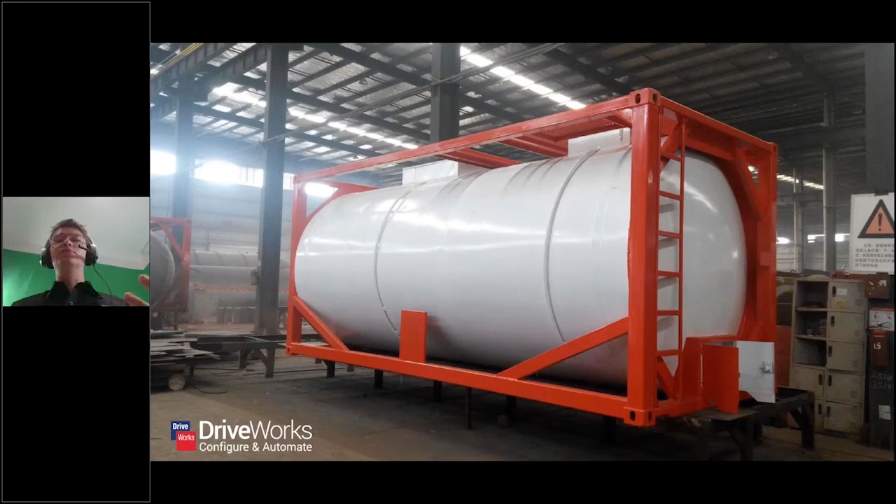Imagine you're a company that designs this pressure vessel and you allow your customers to create their own versions of it. Maybe they vary the dimensions, maybe they add or remove certain features, change the material, the color, whatever it might be, but the core product is still the same. That's what we mean by the same but different.

Now, I'm sure many of you probably aren't in the industry of making pressure vessels, but if you can try and apply what I'm going to talk about in this presentation to your own products, hopefully you can see the benefit of DriveWorks.

So what might typically happen in a normal sales cycle is we might have specification sheets like we can see here for this pressure vessel, where the customer or the salesperson can specify exactly their requirements for this product. So maybe they can change the dimensions or add or remove features.

These specification sheets are then passed to Joe, who is our SolidWorks engineer. And what he does is he sits inside SolidWorks and manually creates all of these files so that they can be sent to the manufacturing department. This is a very time-consuming process.

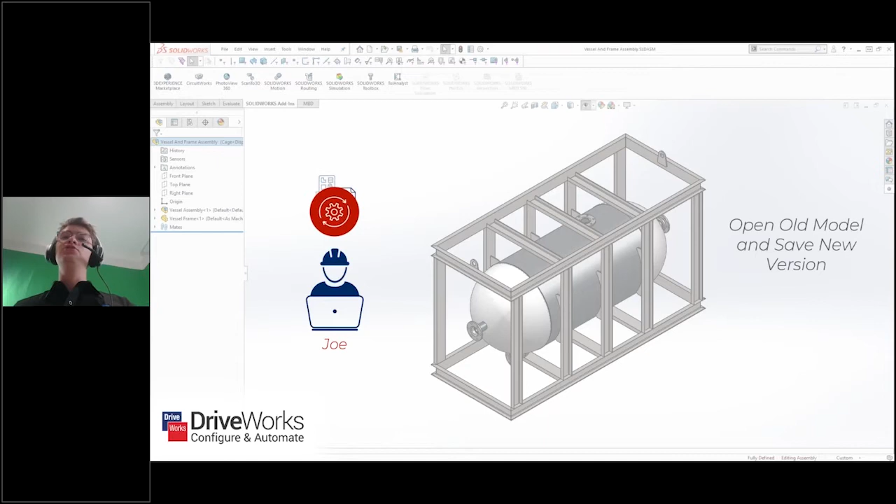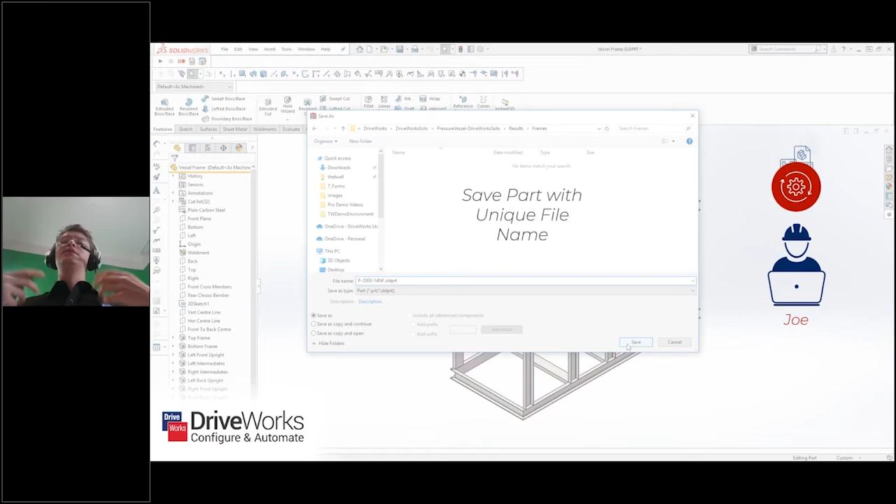So what you might have to do is open the old model and save a unique new version out specifically for this new order. Then you might have to open the part to be changed and make the relevant changes. The changes might be to do with the dimensions, suppressing or unsuppressing features, changing the material, changing some custom properties. And then once he's done all the changes needed according to the specification, he needs to save the part with a unique file name that can be identified to this unique specification.

And then he needs to do the same with the assembly. And once he's done all of that, maybe he then needs to make the manufacturing document so that they can actually build this product. So this is a rather time-consuming process.

But DriveWorks can actually automate this entire process for Joe and make his life a lot easier so that he can work on other things that his business wants him to work on.

And there are 4 key steps to automation using DriveWorks. The first step is to capture your design parameters. This includes selecting the dimensions and the different features that you want to be able to change according to these specifications.

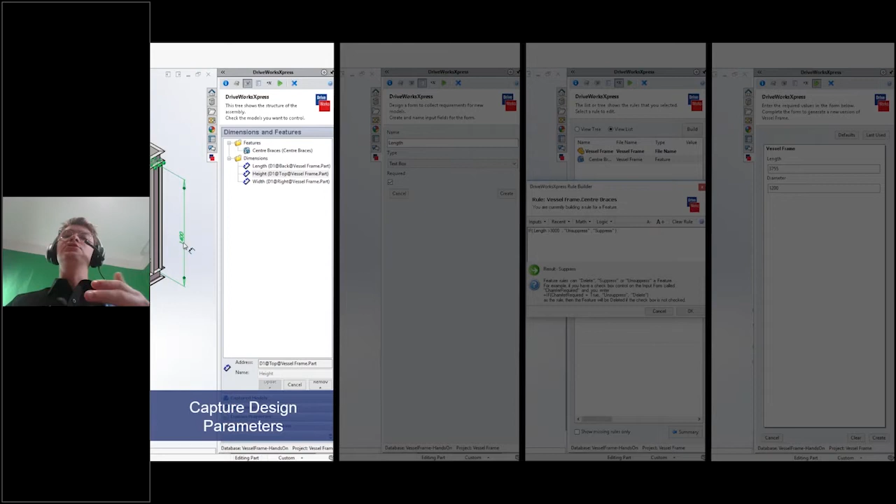Then we have to create an input form, and you can think of an input form as a user interface. The great thing about creating this user interface is it allows people to create specifications and all the models that go along with that specification without actually touching the 3D viewport inside SolidWorks. DriveWorks will handle all of the 3D side of things for you, and all you have to do is input data. So with our user interfaces, we can create text boxes, drop-down lists, check boxes, and dozens of other different control types.

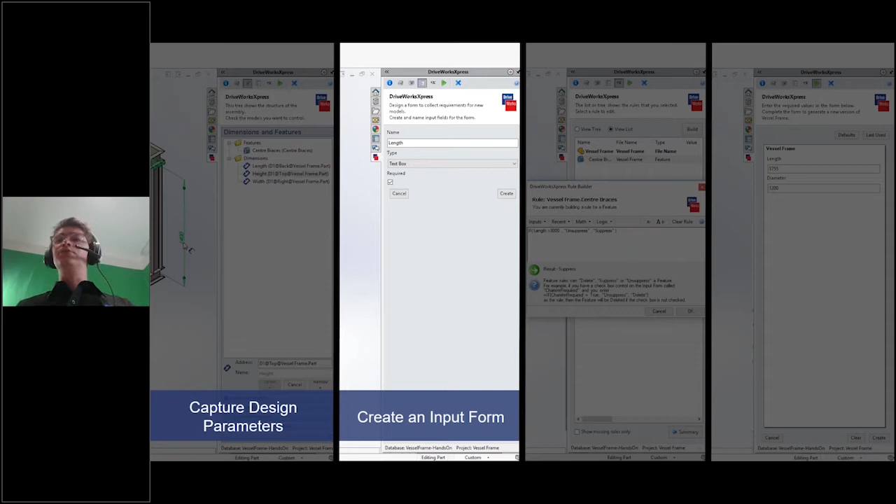Then we need to write our rules. And the really cool thing about DriveWorks rules is it's a great way of offloading knowledge from an engineer's head into DriveWorks, a system that can hold all that information. Regardless of whether those engineers leave the company, all of that design knowledge is maintained inside DriveWorks.

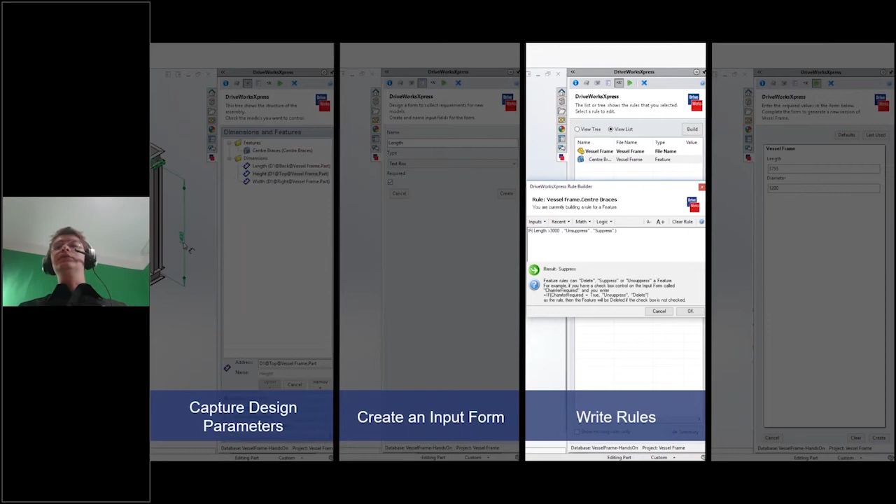And then the last thing to do is to run your project. This involves actually going into your user interface, putting data in, and generating unique models. So I'm just going to quickly run through that now for you.

Hopefully you can see my SolidWorks screen, just let me know if not. So when you're inside SolidWorks, the way you access DriveWorks is going to Tools, Express Products, and then DriveWorks Express. Now, if this is the first time you've done this, you'll be prompted to activate your DriveWorks Express product. All you need for this is a My SolidWorks account, and you should be able to activate this for free. But I'm just going to run you through a project that I've already got set up.

And here you can see the user interface where we can type things in. So for the customer name, I'm just going to put DriveWorks, but this could be anything. For the order number, in this case it's actually just a number of my choosing, but you can have this order number set up so that it automatically uses your company system for creating unique order numbers.

So I'm just going to go for a random number here, but as I said, this can be an intelligent number. Then we actually look at changing some of our design parameters, like the cylinder length of this pressure vessel design. When I hover over the text box, you can see we've got feedback from DriveWorks telling us we have to put in a value between 1,000 and 3,000. Now if I put a number outside of that range, like 800, we're going to get a warning from DriveWorks, and it's not going to allow us to create this design.

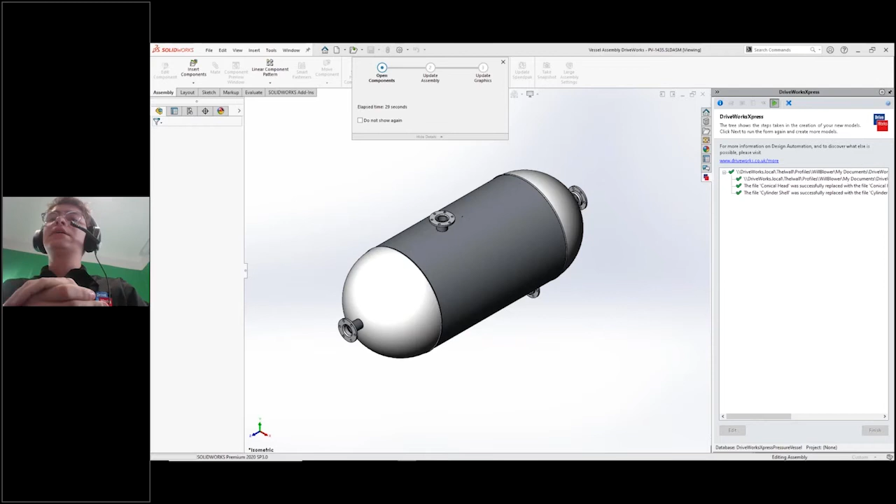As we're going to see in a second, DriveWorks is opening a master file, then opening the parts it needs to change, making those changes, for example to dimensions or different features. Then it's going to save out all these parts with unique file names. On the right-hand side, we'll get reporting and feedback from DriveWorks telling us what's going on. Because we're short on time, I'm not going to run through this bit, but it typically takes about a minute or so to complete that model generation.

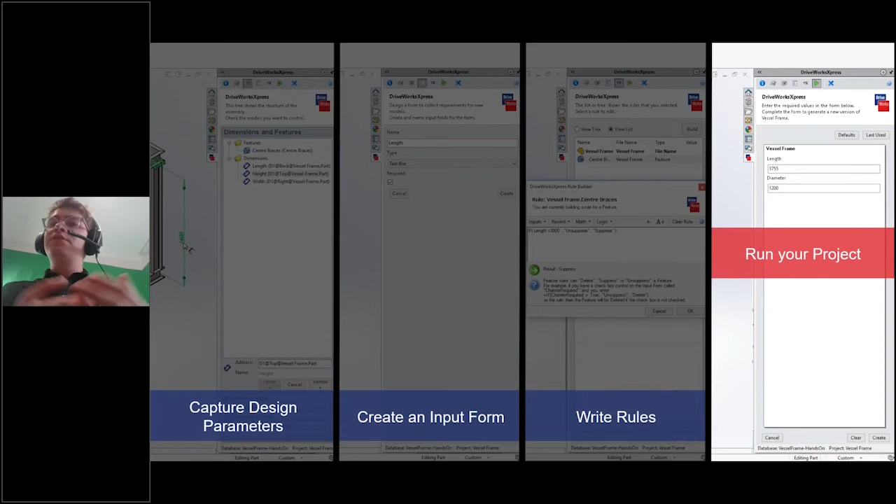And at the end of it, we have a completely unique model that's been created specifically for that specification we just made. So we've seen how DriveWorks does all this automation, but how can this benefit you and your company?

Well, so we've looked at it from a design and engineering point of view. There's less time spent doing repetitive tasks by our engineers. That means their skills can be applied to new and exciting projects. Maybe your company is developing a new product or developing some existing products that they can work on.

And also we're going to be minimizing mistakes. These mistakes come from a variety of places. One of them might be the result of doing repetitive tasks. No matter how many times you do a task, you could end up mistyping a number into one of your dimensions or suppressing the wrong feature, for example.

But from a business and management point of view, we've got a lot of benefits as well. We're going to be able to respond to our sales inquiries much quicker. And this is going to lead to a higher throughput, and it's going to allow us to get our products out the door much faster, and all the financial benefits that come along with that.

We're also, as I mentioned before, going to retain our engineering knowledge inside DriveWorks. So no matter whether our engineers leave the company, we're going to be able to retain all of that design knowledge forever. And new product development can be prioritized, and as a result, we're going to get these new products out the door faster because all of our engineers are now working on these new projects.

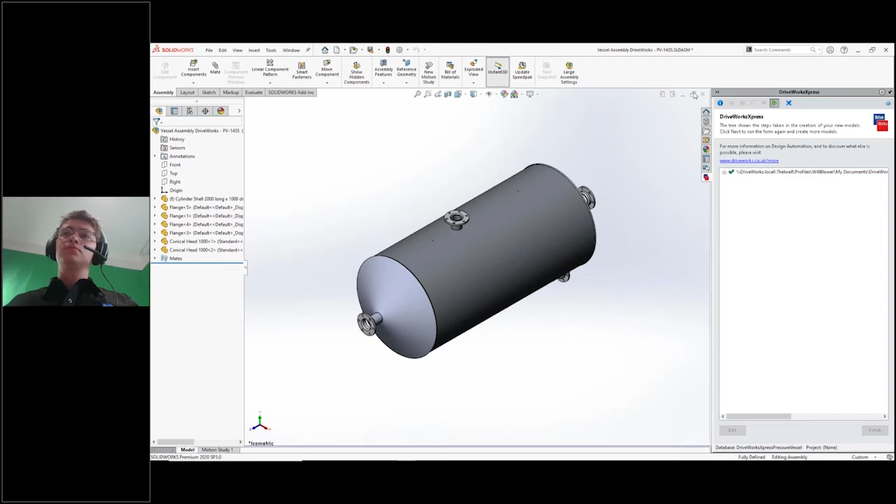Looks like DriveWorks is trying to generate all of our SolidWorks stuff in the background. Here you can see it generating all of our files. I'm not going to show you this, as I said before, mainly because of time constraints. So I'm just going to close SolidWorks down for now.

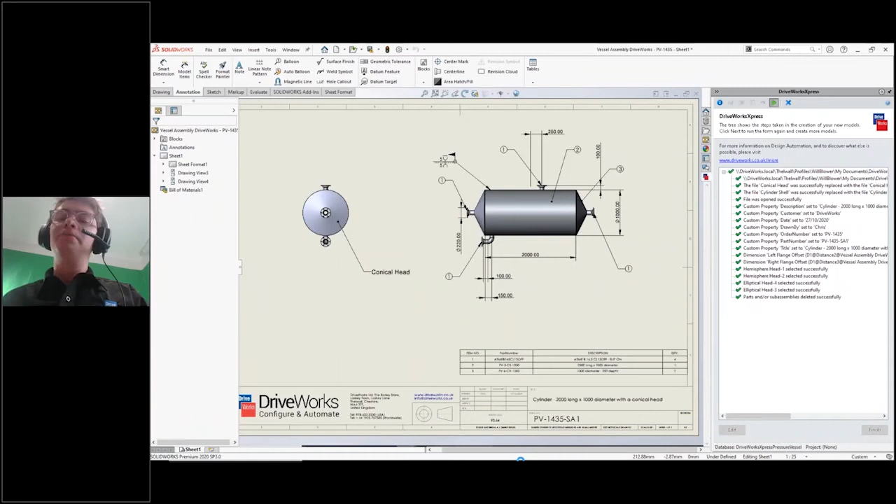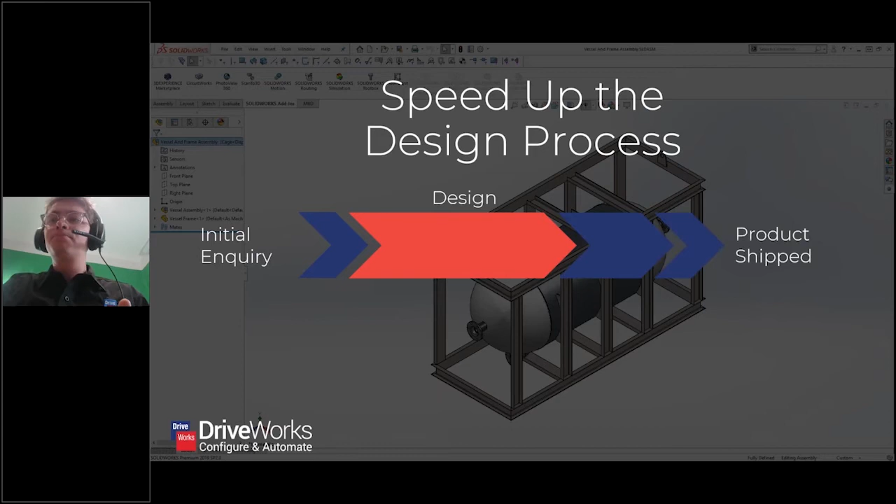Okay, so just to reiterate some of these points. We're going to speed up the design process. If we look at the typical design cycle, we've got this long period where people are making changes inside SolidWorks manually before we can ship the product out the door. But when we automate with DriveWorks, we significantly reduce that design time and get the product out the door much faster.

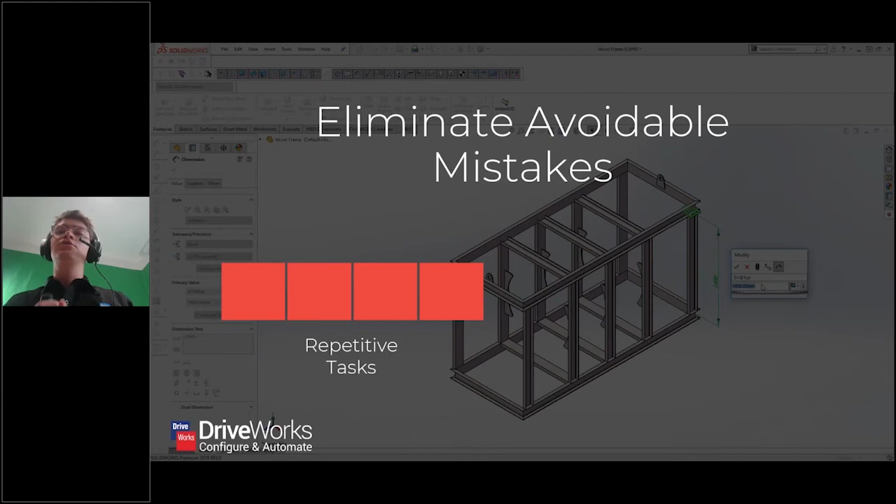We're going to eliminate avoidable mistakes. Repetitive tasks are the source of a lot of errors, so if you're changing the same dimension over and over again, at some point you're going to make a mistake. We're also going to minimize quoting mistakes. This is what I mentioned before about the user interface being intelligent that you build for DriveWorks.

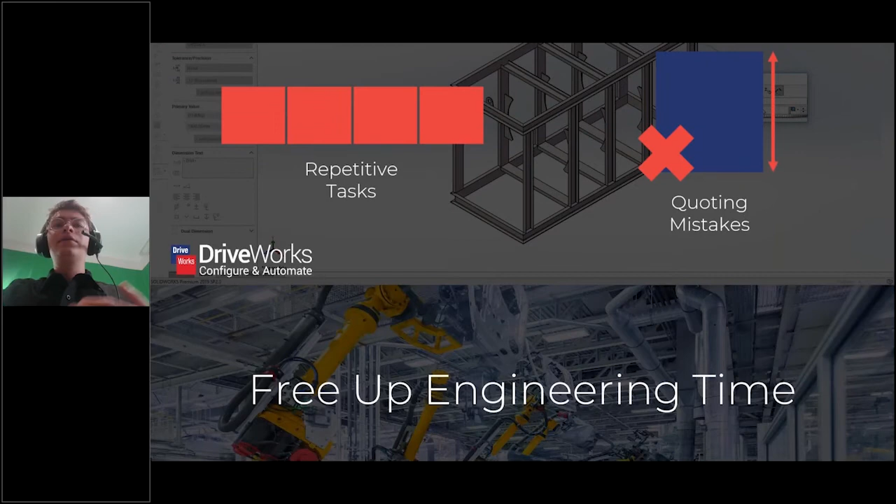It basically means people can only specify products which can actually be made. And then it frees up engineering time, allowing our engineers to work on new projects, develop existing products, and automate more. This is what we really like. As you begin to automate, all these time savings will allow you to keep automating and making your design process more and more efficient.

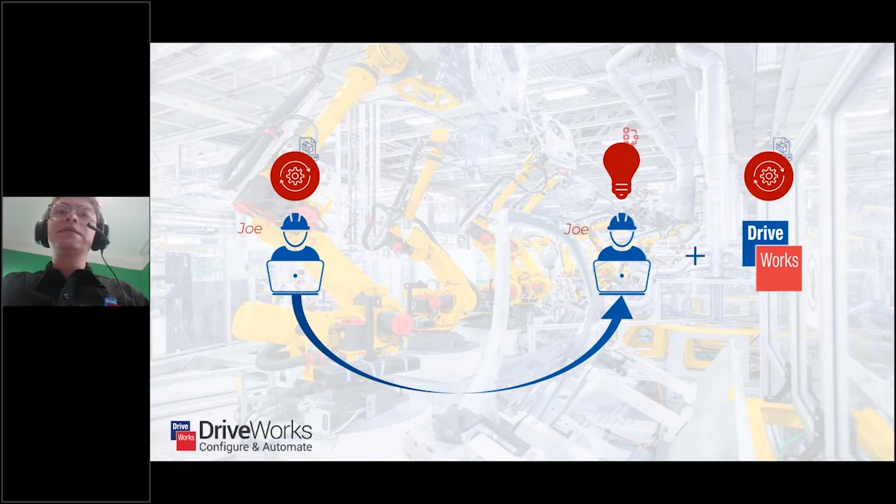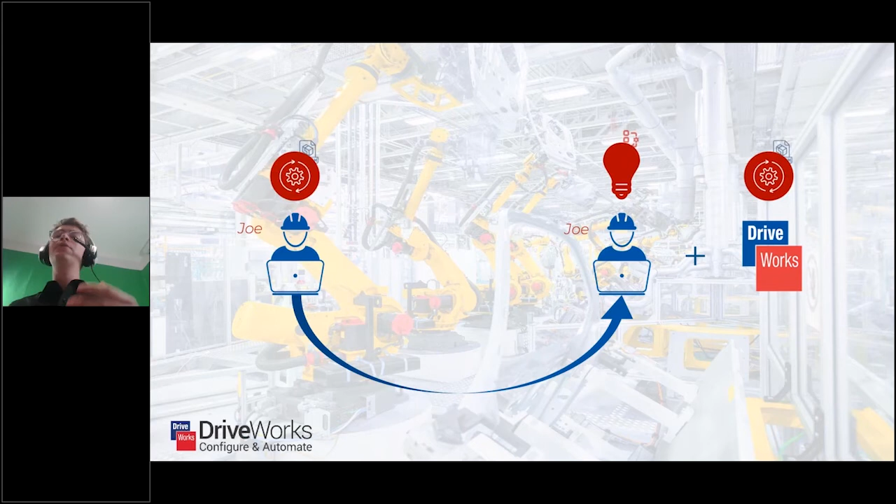So if we go back to Joe the engineer, on the left we can see how he used to work. He used to sit inside SolidWorks and generate all of these SolidWorks files manually. But now on the right we can see Joe working alongside DriveWorks, where DriveWorks is fulfilling the role he used to do, and now he's able to work on new and exciting projects and add lots of value to his company's design cycle.

So you might be thinking at this point that you already use some tools that can create unique parts for you, and one thing that might spring to mind is design tables. For anyone not familiar, a design table is essentially an instance of Excel that sits inside your SolidWorks file, and it allows you to make various configurations of a particular component.

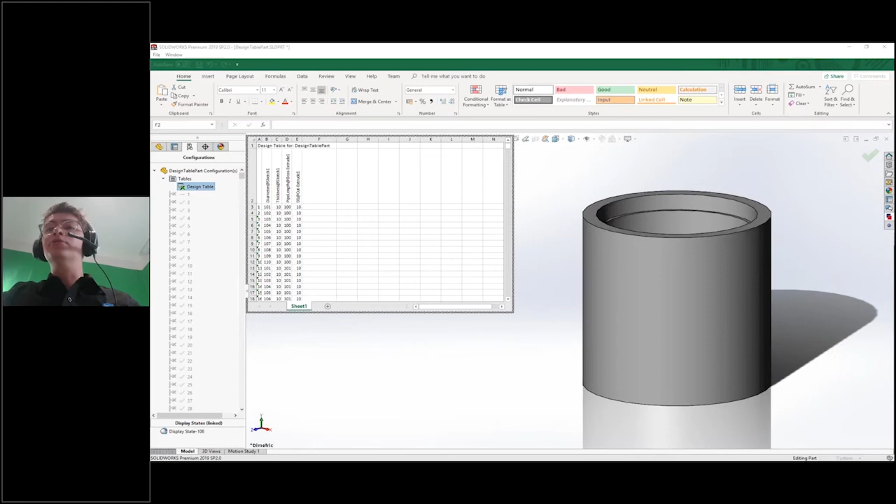Now, there are some limitations to design table functionality when you want a fully automated process, and I'll explain why. Imagine you have a part with 4 dimensions that can be varied, but each of those dimensions can only have one possible value. The number of possible part configurations is therefore 1.

Now, if we make it so that 2 of these dimensions have 10 possible values, the number of possible configurations of that part goes up to 100. And if we keep going and say everything has 10 possible values for each dimension, we get a possible 10,000 configurations of this part.

Now, with design tables, for every new configuration you create, you have to add a new row to the table. The problem is if you wanted to create all 10,000 parts, the file size is going to start climbing rapidly, and your part files are going to start to slow down.

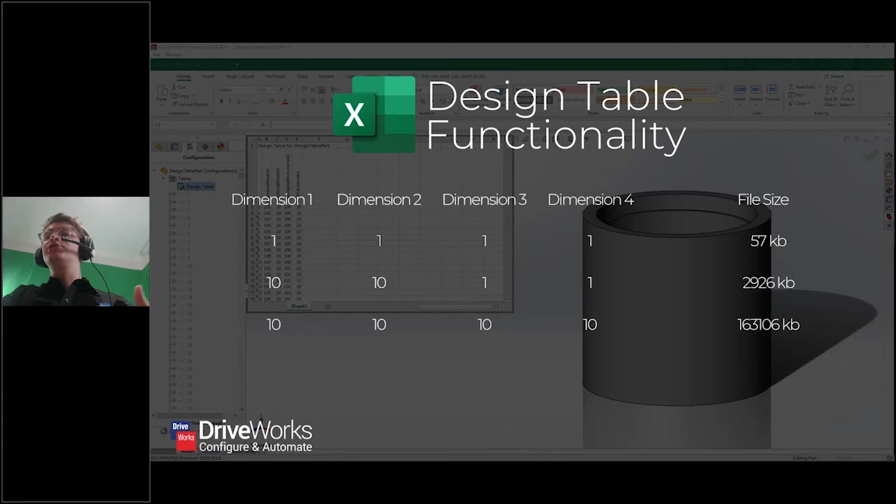If we take this to a slightly more realistic example, imagine we have two dimensions, but each can be incremented at 1 millimeter values up to 1500 millimeters and 1000 millimeters. The total number of part configurations, therefore, would be over 1.5 million. And if you wanted to make your process as efficient as possible, you'd have to insert all of this data in advance just in case this part was required in a future specification. This would make your file size absolutely massive.

Now, DriveWorks doesn't operate in this kind of manner. What we actually like to do is generate the files as and when they're required. There's no pre-preparation of files in advance just in case someone wants to use them. When unique parts are specified, we're actually generating them there and then.

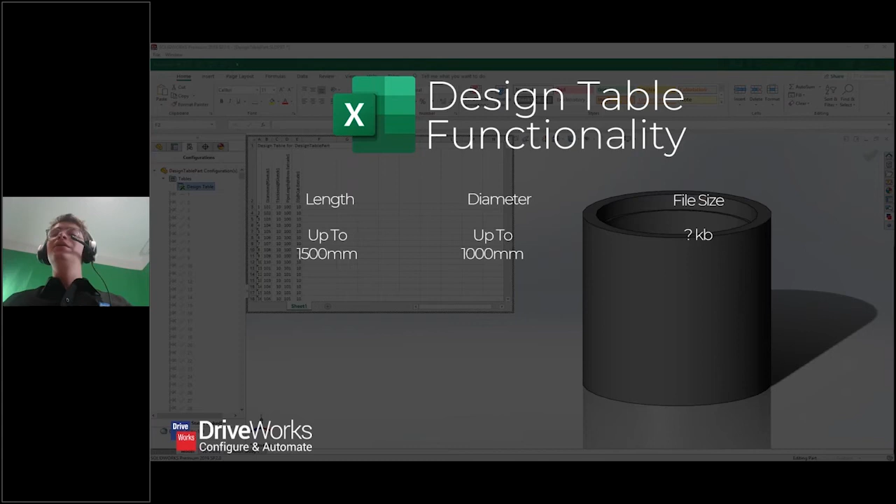Now, one thing you might be wondering is, do I have to automate everything to get the most from DriveWorks? Well, actually no, and we want you to evolve with DriveWorks. What we mean by this is starting with small amounts of automation. So if we go back to this design cycle diagram I showed you earlier, this is our typical design cycle. When you start to implement DriveWorks, you might just start by automating individual components, and it's going to save you time regardless, even if you're just doing a few different components.

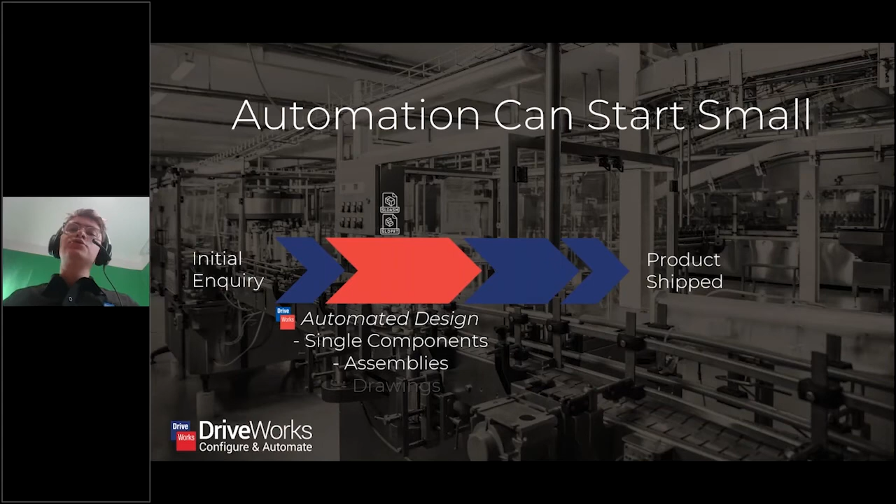You can then start to automate some of your assemblies, and then also automate some of your drawings. And you can see that as you scale up your automation, you're going to save more and more time and make this process more and more efficient.

Now, everything we've seen so far is part of our entry-level design automation product called DriveWorksXpress. And as I've mentioned already, it's included for free in every single seat of SolidWorks, and you could be using it right now to enhance your design process.

But if you want to take it a step further and achieve higher levels of automation, then you might want to consider DriveWorks Solo. With Solo, you can do a lot more with your models and your drawings, and you can also start to create other documents such as quotes and bills of material. We do actually have a 30-day free trial of this product. And the really cool thing is, if you started your project inside DriveWorksXpress but you want to try out Solo, you can actually upscale that project so you don't have to redo all the work again.

Then we have our top tier product, which is DriveWorks Pro, and this is our most powerful design automation tool. We can do really cool things like integrate with SolidWorks PDM directly, and we can check the files that are generated in and out of your PDM vault with built-in tools that we have created. We can also integrate with other company systems such as CRM, ERP, and other CAM systems you might have, and we have many customers that already do this.

So you've seen what's possible with DriveWorks if you put enough time into it. But to start off with, it's probably a good idea to just start off with DriveWorksXpress. As I said before, it's free inside every seat of SolidWorks, and you can have a go at automating your products today for free.

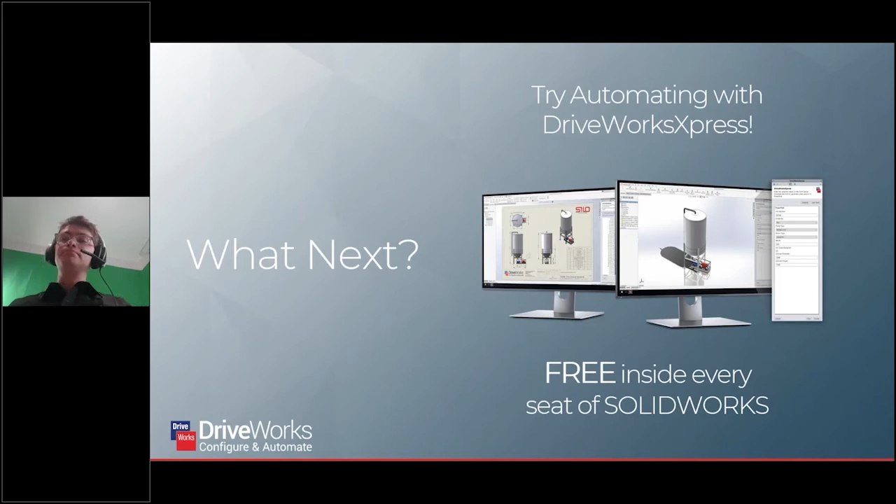If you're not sure where to start, one good place to start might be with the DriveWorksXpress certification, which can be found at driveworksexpresscertification.com. This is free for anyone with access to SolidWorks. The certification itself takes around 3 hours, and in just 3 hours, you could be automating a product to a similar level as we've seen today.

Now, each of our products also has its own certification, and alongside that, you will get a certificate. So you can really enhance your CV, your resume with these certifications if you decide to proceed with some DriveWorks training.